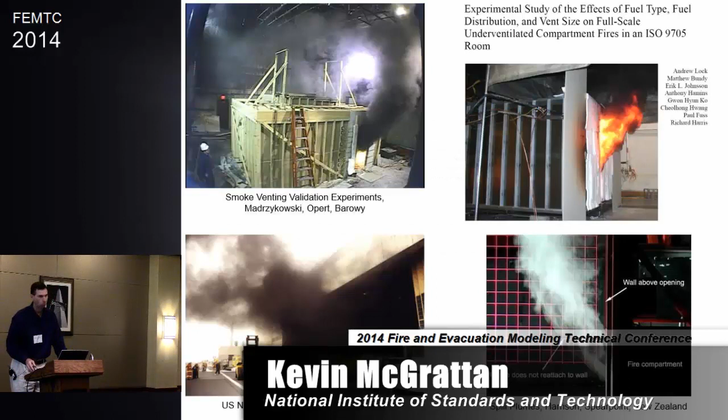So the last time I spoke at this meeting, it was 3 years ago, and I was talking about an emphasis that we were placing on V&V, verification and validation. Just to remind you what those terms mean: verification means, and this is what we do a lot as developers, that we're checking the math, comparing against analytical solutions, making sure that the equations we're coding up in FDS are actually being solved properly.

Validation is where we want to see to what extent do these equations actually represent the real world, fire, for example. How well does it represent the physics? So a lot of our work is validation, which I'll talk about today.

I've just got some snapshots of some experiments that we've looked at over the last couple of years. My role in doing V&V is to look at a lot of the work that's been done in the last 30 or 40 years. There's a tremendous amount of data out there, conducted at labs throughout the world.

The trouble is that this data is sometimes hard to find. You know how it goes—you have a student that does some experiments, publishes a paper, graduates, gone. And I've had a hell of a time trying to track this stuff down. So for those of you here, I'll make the appeal one more time: if you're a graduate student, master's, PhD, or you work at a lab, and you've got some data that you think would be good for FDS validation, please contact us.

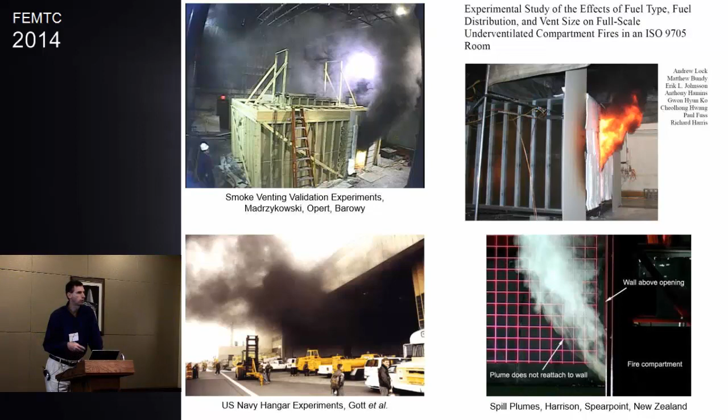These are just some other miscellaneous experiments that we've looked at over the years. United Technologies and VTT have done some work on mist suppression, so we've gotten some data from them. Jason Floyd worked with the National Fire Protection Research Foundation doing telecom facilities and smoke detection with high air change rates. We've got some people at NIST doing wind engineering. A colleague of ours at FAA is doing some work with smoke movement in cargo holds. So there's a whole bunch of different things going on in different parts of the world, special applications.

What we're really trying to do is gather up this data and expand the database of FDS applications, because we envision in the next 10 years that when practicing fire protection engineers take a potential design to an authority having jurisdiction, we want that authority to ask, what's the basis of the validation for this work? Can you show me an experiment that shows FDS works well for this application?

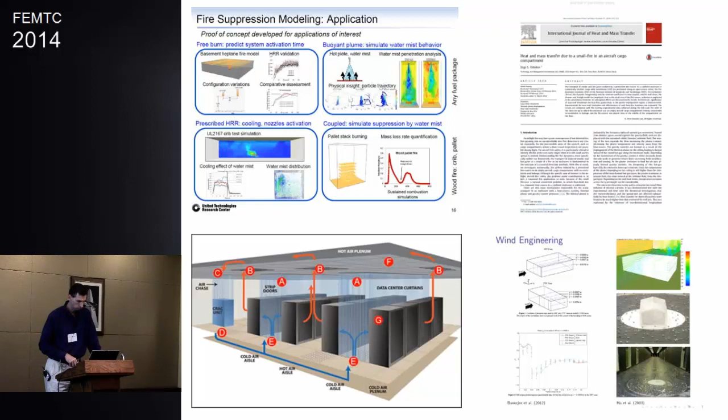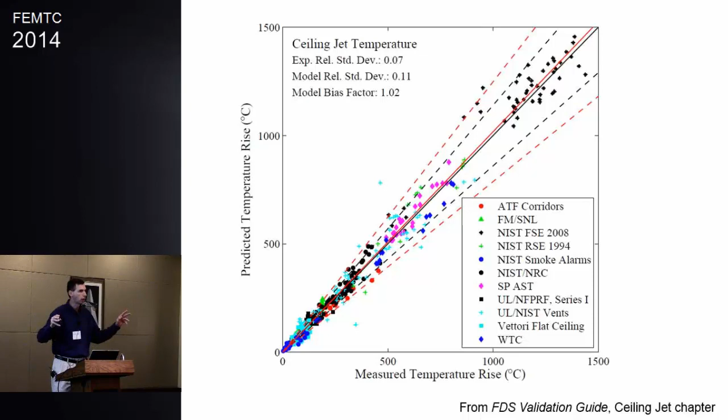You'll notice that we now go from 0 to 1,500 degrees Celsius. When you're up at 1,500 degrees Celsius in a compartment fire, that's pretty hot. So now if someone asks, well, how good is FDS at predicting X, Y, or Z, we show them these kinds of plots. The black lines represent the experimental uncertainty. The red lines represent, in some sense, the model uncertainty.

Did I jump over a slide? Yeah, I jumped over a slide.

We put together a very simple way of expressing the model uncertainty. I've gotten a little grief from people saying, well, I don't remember this statistics, I took that 20 years ago. But the best way to think about this is, remember when you were in high school and the teacher said he was grading on the curve? You got a 65 on an exam and the mean was 55, and the grades were shifted based on if you were 1 standard deviation or 2 standard deviations above the mean. In a similar way, that's how we're expressing our model uncertainty.

So, for example, if you take FDS and it predicts a temperature of 300, and you know that the model has a particular bias, that is, it tends to overpredict or underpredict by 5%, 10%, whatnot, we have in the validation guide a very simple method of expressing the uncertainty of that calculation. I think that's very important when you present results to an authority, not just to say FDS predicted 300, 300 is less than 330, therefore we're good. You want to be able to express that with the uncertainty of the calculation in mind.

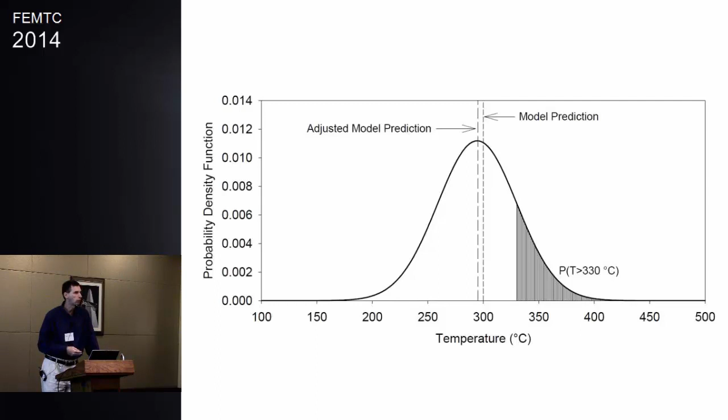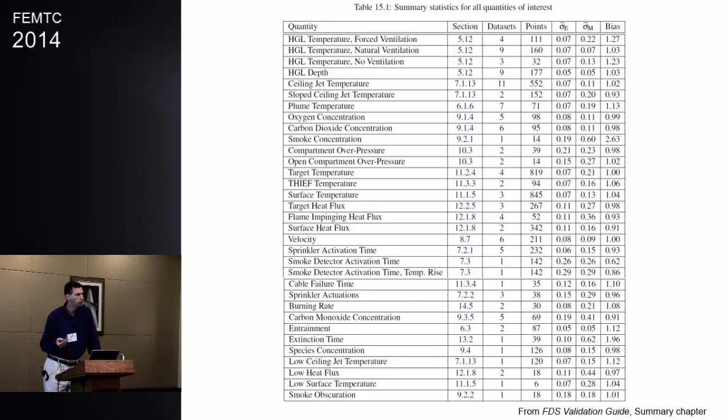With the help of Chris Overholt, we now, when we process all this validation data, and in the last few years we have about 800 to 900 individual experiments, I'd say about 5,000 individual points. In the validation guide, in the back, we list all the different quantities that we are predicting in these experiments, a reference to where in the guide we discuss it, the number of data sets that we have, the number of individual experiments, and the model bias and the standard deviation, and also the experimental uncertainty.

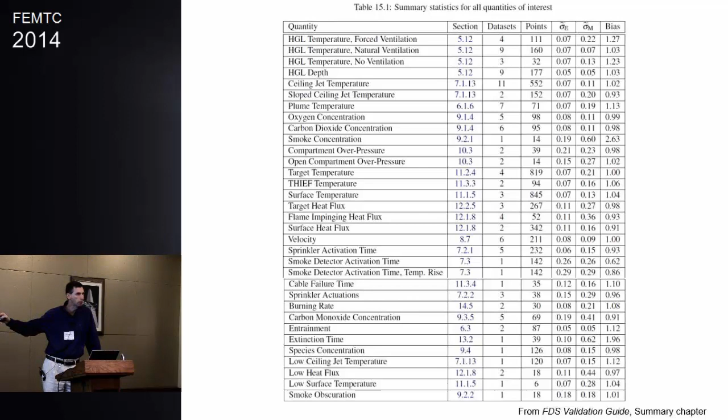When we talk to people who want to do new validation work, we say, take a look at this chart, and if you see for ceiling jet temperature 11 data sets and 552 points, okay, that's where we think we have some pretty decent coverage. Go down the list, though, and you see for a lot of these quantities, quantities that people use FDS to predict, we have 1 data set, 2 data sets, one or two data sets. We'd like to, in the coming years, continue to increase the number of data sets, the number of experimental points, to add more validity to our calculations.

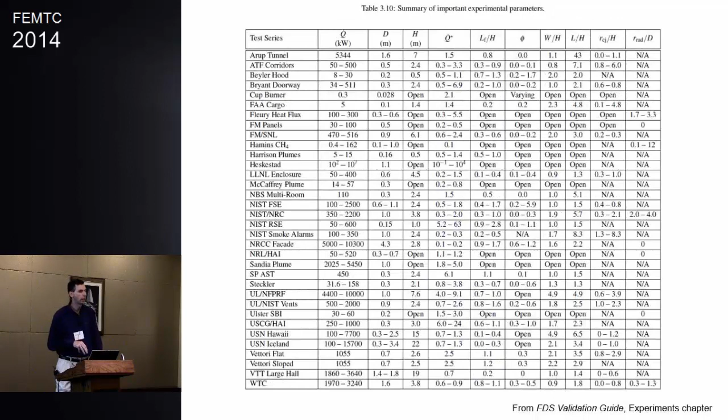A lot of this work has been driven by the U.S. Nuclear Regulatory Commission. They are a big supporter of ours, and I do a lot of work with them. You see here that we just got through our second round of a V&V exercise with them.

So you can think of the verification and validation work we do with US NRC as a subset of our more comprehensive validation guide for FDS. A lot of people are confused by what validation actually means. Well, is the model validated or is it not? It really depends on what the application is.

So the NRC comes to us along with EPRI, the Electric Power Research Institute, and they say, we see that your models, FDS and CFAST, are being used by licensees to do fire PRA, probabilistic risk assessments. We need to know how accurate those models are. So they select experiments that are closely aligned with fire scenarios that they expect to see in plants, and they want to know for those types of applications how good the model is.

And we have a similar chart to the one I showed, but not only for FDS, but for CFAST. There's a zone model developed in France called MAGIC, and then the empirical correlations. This is something new. We've actually gone back in time 30 or 40 years, and we're now including the empirical correlations in our V&V exercise.

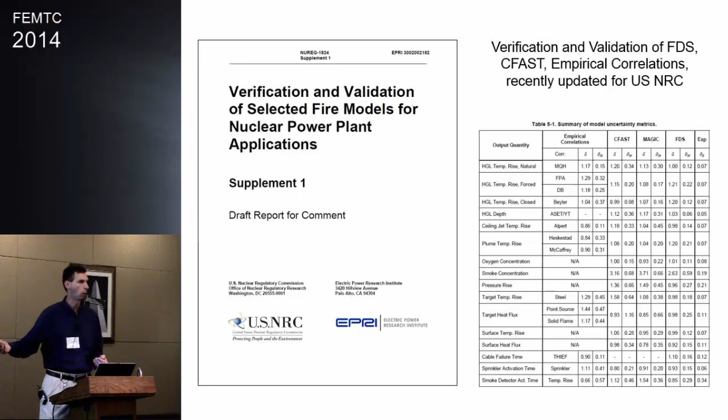Because what we've noticed is that, in practice, certainly in the nuclear industry and out, you don't just necessarily use FDS for everything. Sometimes you'll use zone models, sometimes you use these empirical correlations. It depends on the job. And we want to be able to express the uncertainty of all these models in a consistent way. So the NRC has really helped us in that regard.

Another emphasis is, if you look in the validation guide, we're trying to expand the range of our experiments. So if you look here, these are all the different experiments that we've looked at, the heat release rates, fire diameters, ceiling heights, and a number of non-dimensional quantities.

I discussed this at the last meeting, but basically for a given fire scenario, you can express things like the fire Froude number, or Q star, the equivalence ratio, whether the fire is under-ventilated or over-ventilated, the ratio of the compartment's length to height. These are all non-dimensional quantities that kind of characterize the fire scenario.

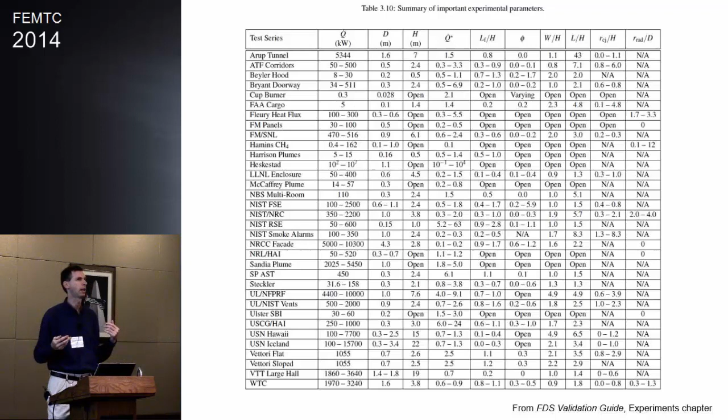And our goal in doing V&V is to expand that range. Because if you're an authority having jurisdiction and someone comes to you modeling some crazy, huge facility, you might say, wait a second, is the model appropriate for this? And you can look at these non-dimensional quantities and decide whether or not it is.

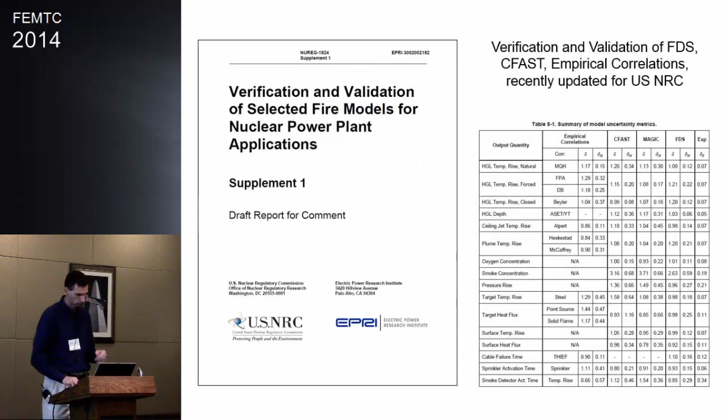Okay, so a lot of the work we've done in V&V is focusing on gas phase quantities. But we still, surprisingly, are somewhat far behind in actually modeling the actual burning of stuff, or pyrolysis.

Now, for many of you who do fire protection engineering design, pyrolysis isn't all that important, right? Because usually you're dealing with some kind of specified fire. If you were analyzing this hotel, and let's say it had a lobby with some unusual geometry, the authority having jurisdiction would probably give you a heat release rate for, say, the restaurant if it were to flash over. And you just dial that heat release rate into your model, and then you predict temperatures and smoke concentrations and what have you. So there hasn't been as much driving us into pyrolysis as you might think.

I mean, as a fire modeler, I'd like to be able to model fire, including the actual burning of stuff, but a lot of what our users are driving is the gas phase for specified fires. But we still are interested in doing pyrolysis. So I thought what I would do today is just give you a brief history of pyrolysis modeling and try to give you an idea of where we're going with it.

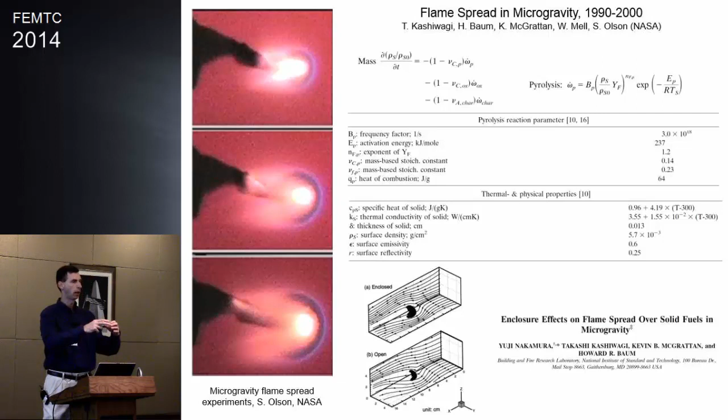One of the experiments she did was to take a piece of tissue paper called a Kim wipe, ignite it, and watch the flame spread. In a zero gravity environment, the flame spread is like a donut expanding out from the ignition point. And that's nice because from a modeling point of view, it's a very simple laminar flame.

So Takashi and some of his co-workers from Japan developed a model, and that model consisted of a description of the Kim wipe that had 3 reactions when it heated up: first you eject fuel, then char forms, and then the char oxidizes.

Along with the 3 reactions, there are about a dozen measurements that need to be made of things like K, rho, and C - thermal conductivity, specific heat, density, and kinetic constants. These kinetic constants are measured with things known as TGA, thermogravimetric analysis, DSC, MCC - there's a series of bench scale tests. Chris Lautenberger was supposed to be here, and that's the sort of thing he does with Gpyro.

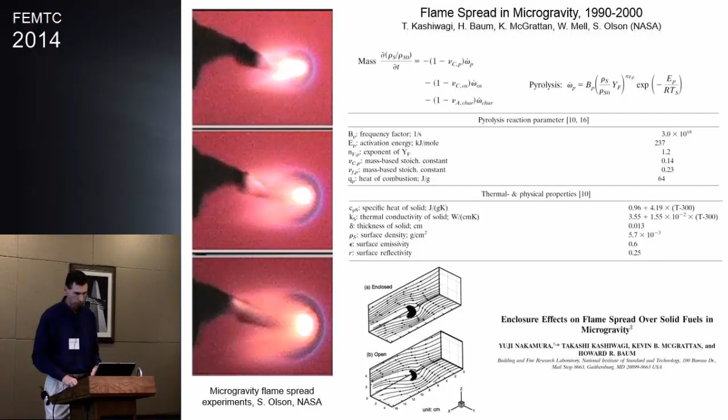Nevertheless, we had, in 1991, a fairly comprehensive description of the pyrolysis of this piece of tissue paper. Trouble is that it really was appropriate for small scale, like direct numerical simulations.

We were very quickly pushed into a completely different area looking at rack storage fires, because we happened to be working with the Research Foundation, the National Fire Protection Research Foundation, on a project to look at the effectiveness of sprinklers, vents, and draft curtains in big box retail facilities. So we started developing what would eventually become FDS to look at these kinds of big fires.

With these kinds of things, we couldn't use that simple first principles type of pyrolysis model that we use for microgravity. For this application, in order to predict the spread of fire on these boxes, what we would literally do is just measure K, rho, and C for the boxes - the basic thermal properties. And when the boxes heat up to a certain ignition temperature, they burn at a specified rate, which you get from a measurement like a cone calorimeter measurement, or something even larger, like when we burn a couple of boxes at a time.

I had thought that this was kind of a placeholder pyrolysis model, something we would eventually replace with the more fundamental model used for the microgravity applications. Sad to say, this really has not been replaced - this is still the workhorse pyrolysis model. For anyone doing it, this is what we typically recommend, because getting these fundamental properties through TGA and MCC is difficult. I'll talk about that in a little while.

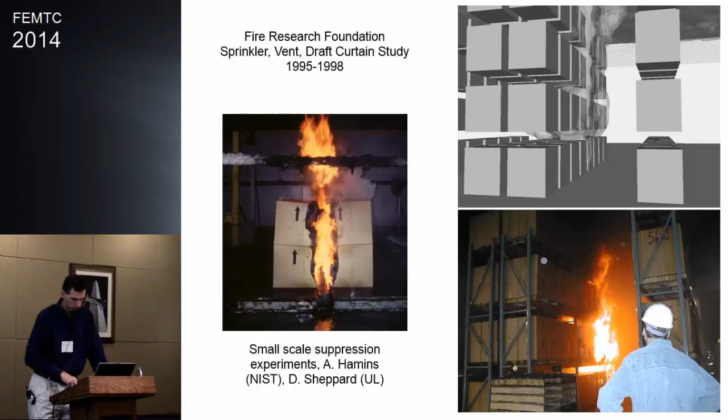We get calls all the time, posts on the discussion group - hey, I got such and such a sprinkler, what are the properties of this? We don't know. What are the properties of the carpet and the chairs you're sitting on? We don't know. We can give you some suggestions as to how to measure them, but even then we can't tell you exactly what to measure. So we really have not come as far along in developing this database as I had hoped.

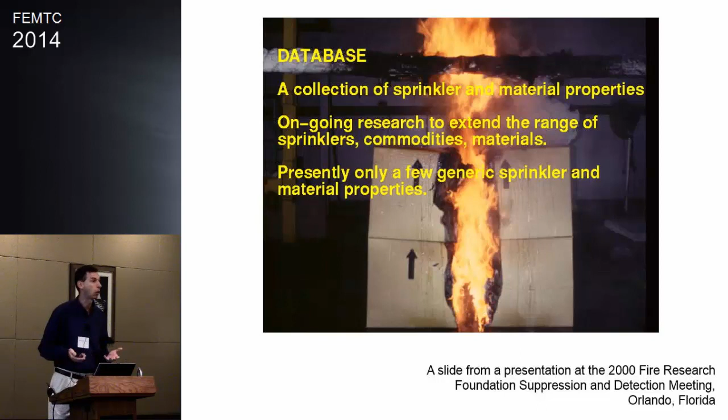But the applications just keep coming, even though we were a bit disappointed with the progress in pyrolysis models. So we continued doing work with the simple K-rho-C ignition temperature, specified burning rate model. And we started getting into forensics. One of our first applications was a fire that occurred down in DC in 1999, known as the Cherry Road Fire, in which 3 firefighters died at the top of a stairway due to a fire that flashed over in a basement.

This was done with FDS-1. You can see SmokeView 1.0.1a there. A little bit of FDS trivia: that default color that you see in that picture, Glenn Forney chose to match the boxes of that previous application, the box burning application, and that still remains our default color.

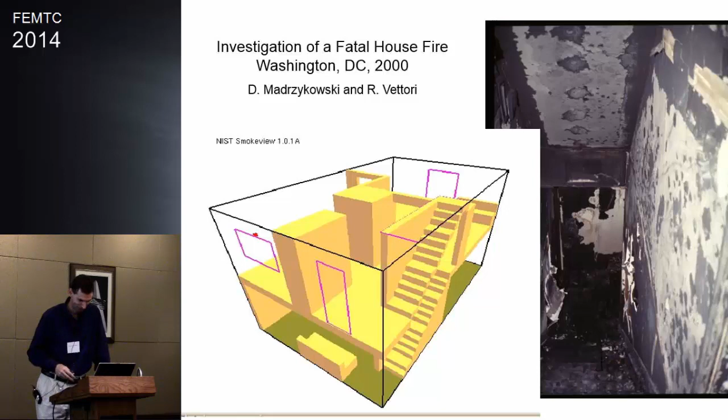Then, the next thing we were moved into was the World Trade Center investigation. Let me see if I can make this go. There we go. Make it work. All right.

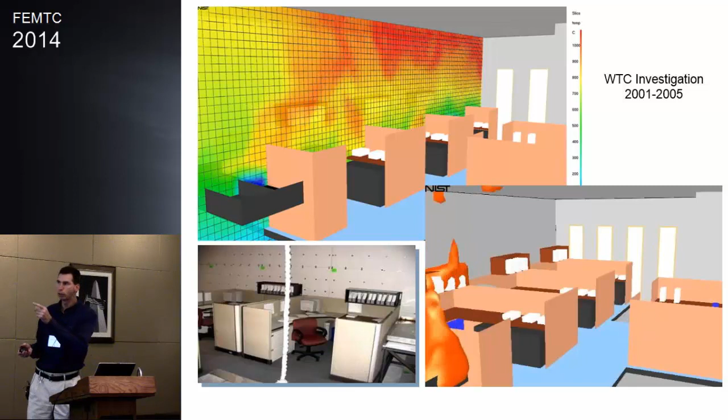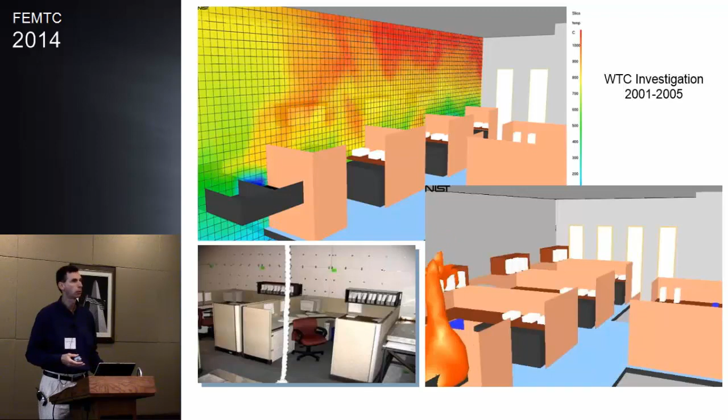So when we started doing the World Trade Center investigation, we were confronted with typical office furnishings: desks, chairs, computers, paper, and so forth. We did a lot of cone calorimeter work, but we still used this same kind of pyrolysis model. We got the basic K, rho, and C, assigned an ignition temperature, and we were able to model the spread of a fire through a building reasonably well, but not to the point of making a prediction. What we had to do is burn some of these workstations at full scale, calibrate our model, and then apply it to the whole building. That's less than satisfactory, but that's what we had at the time.

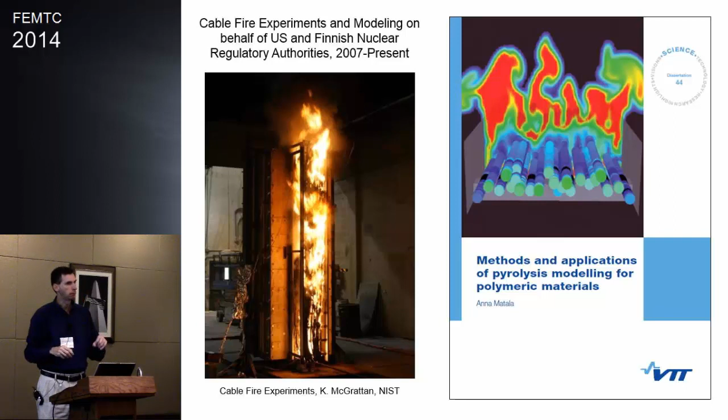In the meantime, we've developed some special pyrolysis models. Ruddy Mell has done work with the U.S. Forest Service predicting fire spread through vegetation, and we have a very special model for that. Anna Matala at VTT, as part of her PhD thesis, developed a model of electrical cable burning in which she used, you can see here a rendering from SmokeView, essentially little thermal elements that are cylindrically shaped and they burn at a specified rate. Simo Hostikka at VTT has continually improved our solid phase model, and he's built into FDS all the mechanisms that we need to do the pyrolysis the way we used to do it in that microgravity application.

But what we're finding, the problem is getting the data. This little device here is a TGA-DSC combination. It's a standard test apparatus, but it's very difficult - well, it's not difficult to run if it's working and if you have people who know what they're doing. But what we're finding is that it's very difficult to get these fundamental properties, for example, everything in this room if you wanted to model fire spread in here.

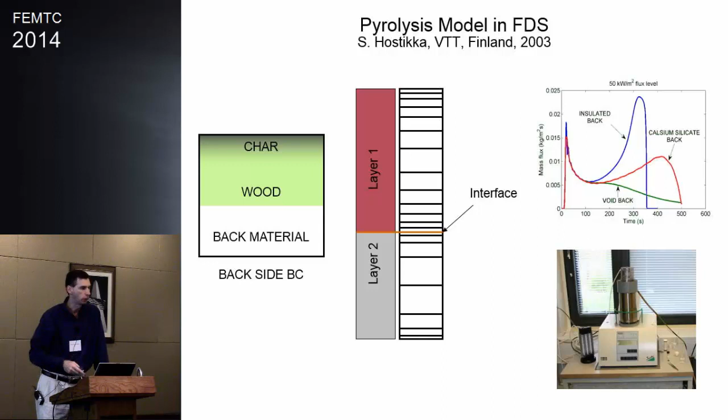I've worked in recent years with Stas Stoliarov, who was at FAA and now he's at Maryland, for something like PVC. This is the number of properties that you need if you want to model the PVC combustion or pyrolysis using first principles, where you're looking at the kinetics, you're looking at the details of the thermal conduction into the solid.

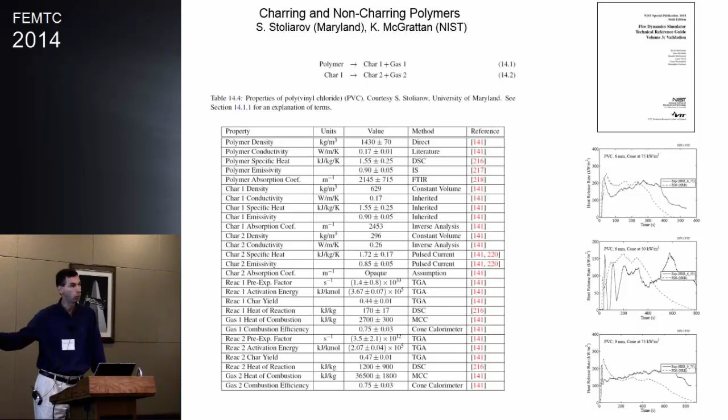This is still, we're still kind of stuck at the simple PMMA plastics. We have yet to take this methodology and simplify it to the point where you could take a piece of carpet or a piece of chair, go to a standard testing lab, make these measurements, and then put them in the model. At the moment, I like to say that this is a PhD thesis - that's just not practical. A lot of good work's been done, but we're still not at the point where you can just go to a testing lab, get these properties, and plug them into something like FDS.

So I'll stop there and take questions if you have them. Just one question, I think. Keep things on track. We're on track.